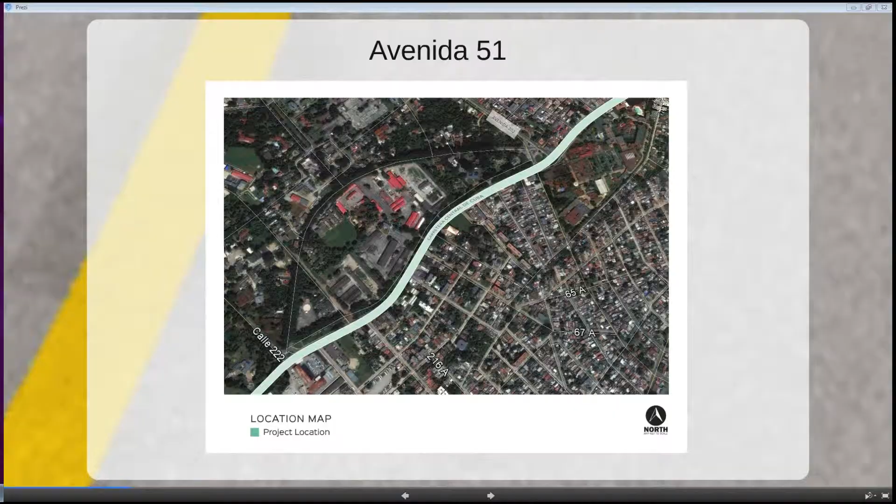This right here is the location map of the corridor we're going to be analyzing, and you can see our boundaries from Calle 222 to Avenida 202, and we've created this for you. This is a little background on Carretera Central. It's a highway that gives east and west access throughout the island of Cuba. The construction began in 1927, and it was completed in 1931, and it cost about $107,000 per mile to complete this project.

In the 1950s, Carretera Central was one of the most efficient highway systems in Latin America, but since the late 1950s, there hasn't been much investment made into the transportation system, which has caused the roads and the highway system to deteriorate. And this has affected the economic growth for Cuba. And right here, we've shown a map of Carretera Central.

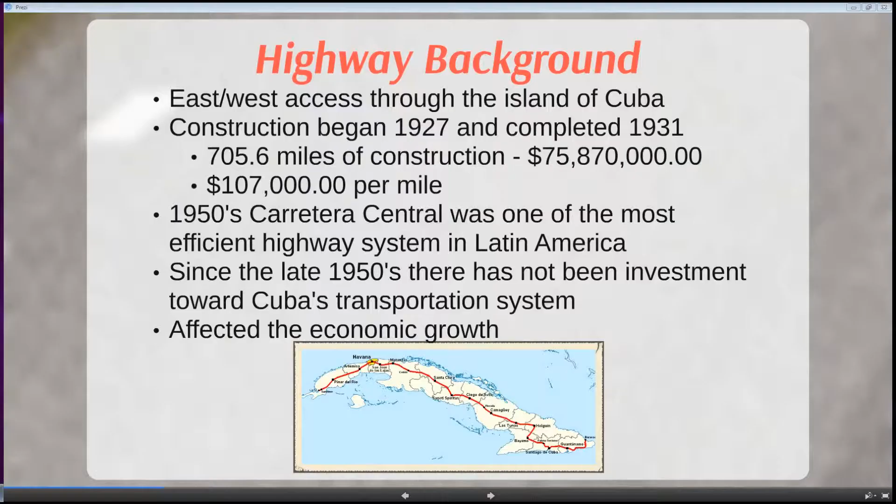Okay, for the roadway characteristics, Avenida 51 is a major arterial. It runs from Pinar del Rio to Guantánamo. But within the project vicinity, Avenida 51 is going to be a 4-lane, 2-way undivided roadway. It's going to have 11-foot travel lanes, 10-foot shoulders, sidewalks, and the posted speed limit will be 40 miles per hour. And we've shown this exhibit here for you, which is the proposed lane configuration for our corridor.

And the two intersections, which are Calle 222 and Avenida 202, are local roadways. Calle 222 is going to be a 2-lane, 2-way undivided roadway. And Avenida 202, on the north side of Avenida 51, is going to be a 4-lane, 2-way undivided roadway. And the south section will be a 2-lane, 2-way undivided roadway.

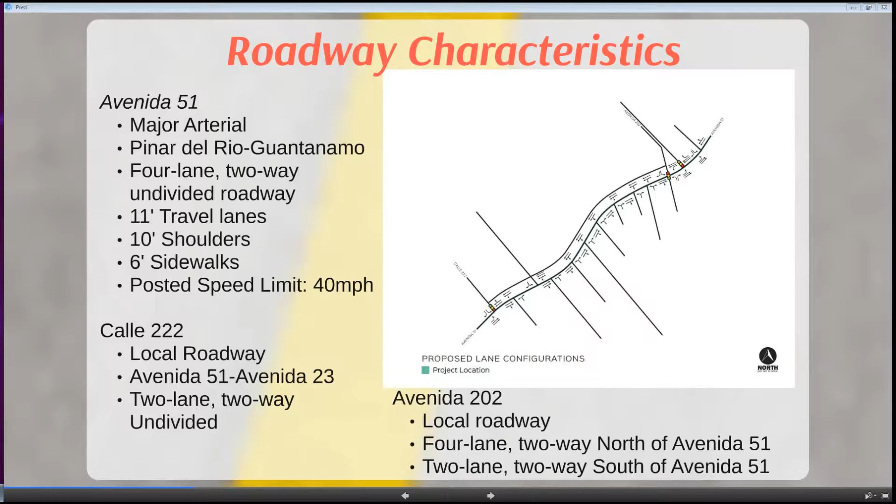In order to perform the roadway capacity, we're going to use the Synchro software for the intersections and the corridor, and this will help us establish the existing level of service and the future level of service of this to make sure it will run smoothly.

In order to get this information, we're going to have to do turning movement counts and segment volume counts during the AM and PM peak periods, and this will help establish the existing level of service. And right here we provided, from the Florida Department of Transportation, the quality level of service for a 2-lane undivided with left turn lanes. And these are the peak direction volumes for each level of service.

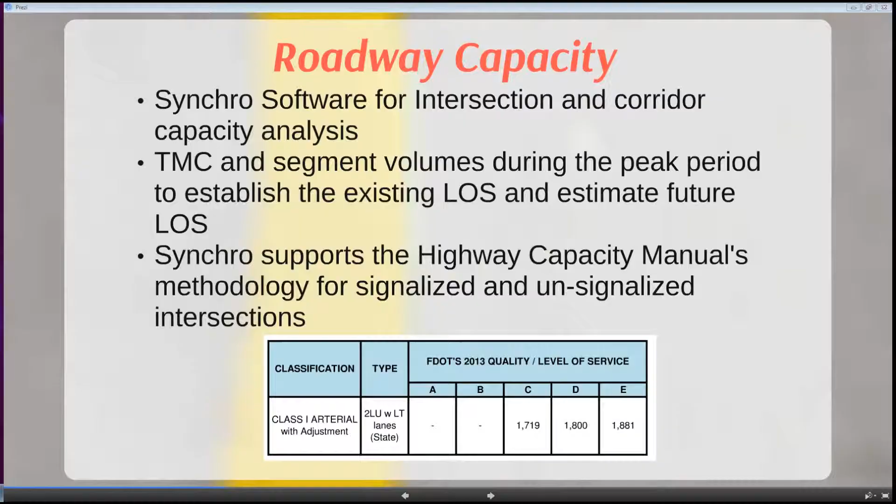For the intersection analysis, what we're going to accomplish is a safer roadway for drivers and pedestrians, since there's a high percentage of pedestrians on this roadway. Also, for this intersection, the signage position and size is very important because you do have drivers with vision issues and slow reaction time. And by fixing this, it will help prevent high rates of crashes and pedestrian fatalities.

Also, by having intersections, it will control the right-of-way, and this will reduce any traffic delays, accidents, and conflicts to the existing and future traffic. And in order to achieve this, the intersection capacity will have to be established. And if we do have to implement new intersections, a traffic signal warrant will be recommended to make sure that it is needed at that section and not create extra chaos in the traffic. And also signal timing implementations will be needed.

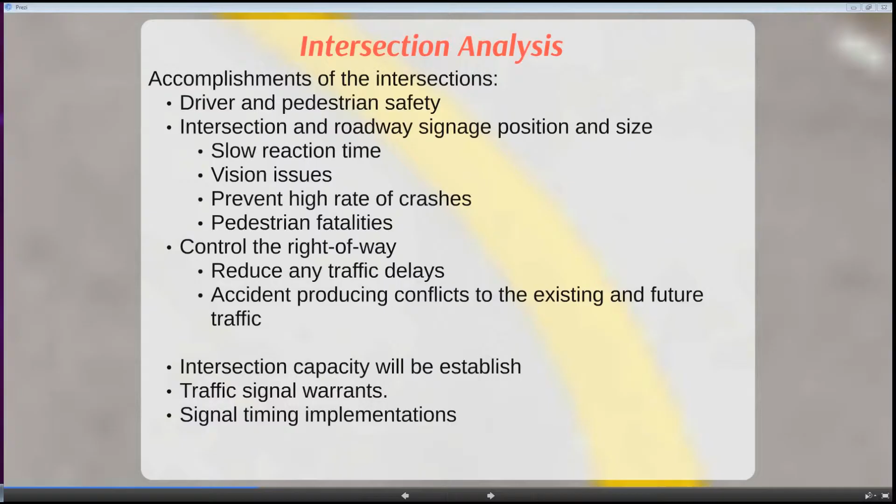I had to press play.

This is a simulation we've created for you today from Synchro. So you can see the corridor. We've put some traffic in it. And you can also see the two intersections, and it's going to zoom in and show the traffic flow on the corridor.

As far as signalization is concerned, we plan on placing a mast arm at the intersection of Calle 222 and Avenida 51, as well as mast arms at the intersection of Avenida 202 and Avenida 51.

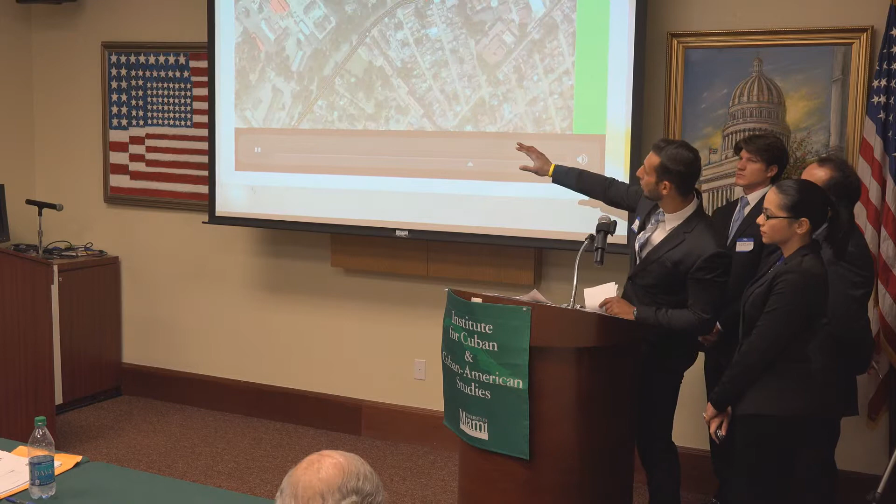Over here, as you can see on the side streets, we utilize stop signs along the side streets because if not, it'll create too much stopping and going. And then over here on this side of the project, later I'm going to show you a detour plan that will utilize these side streets around the back for detour planning for nightly shifts to be able to phase the traffic back and forth.

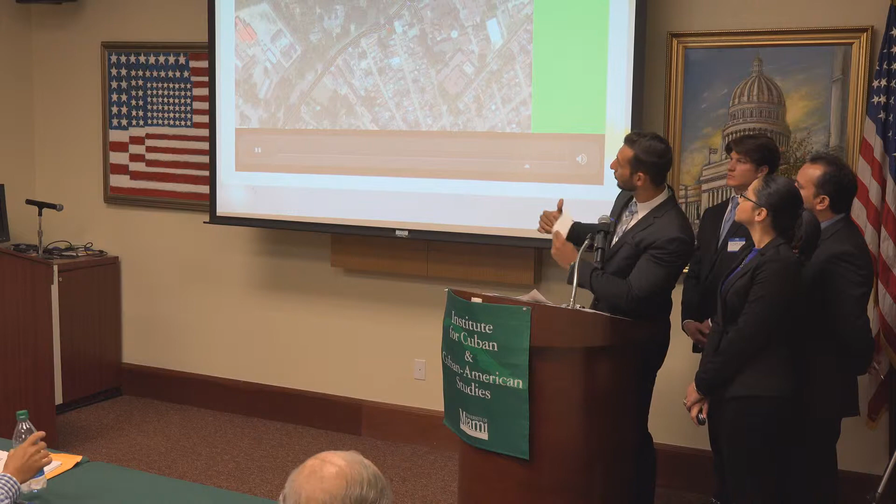All right, so it takes several disciplines to get a project like this done. One of these disciplines is going to be the geotechnical engineering aspect. We approximate there will be no more than 3 core borings needed for this project. Mainly, we take a core boring where we expect miscellaneous structures to be placed, so at least 1 per intersection. The borings will be done using the standard penetration test.

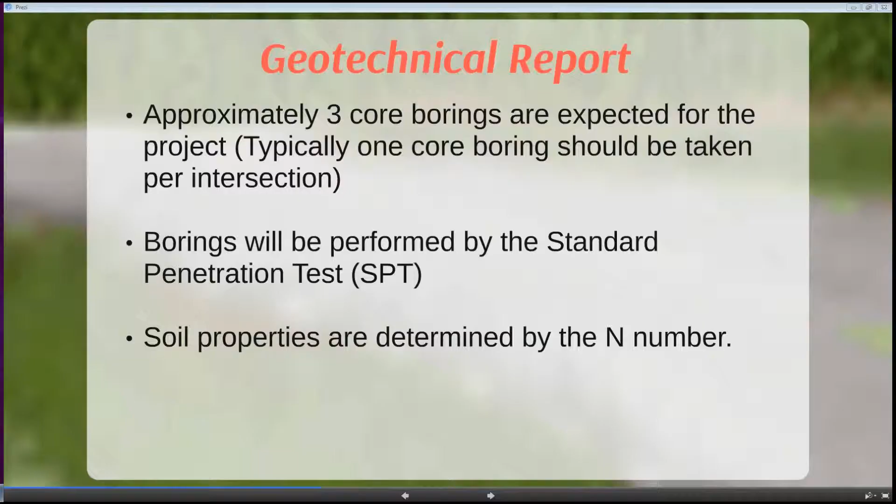This will allow us to get N values that will later lead to other soil properties, which I'll go over later on, to basically design the roadway and the foundation for the structures. In our previous research, we have seen that the predominant material in this area is the red limestone. That being said, we are not going to blindly go by this. When we take the geotechnical core borings, we plan on taking the material to the lab to analyze and find out if the research is backed and find out the true strength of the material in the area.

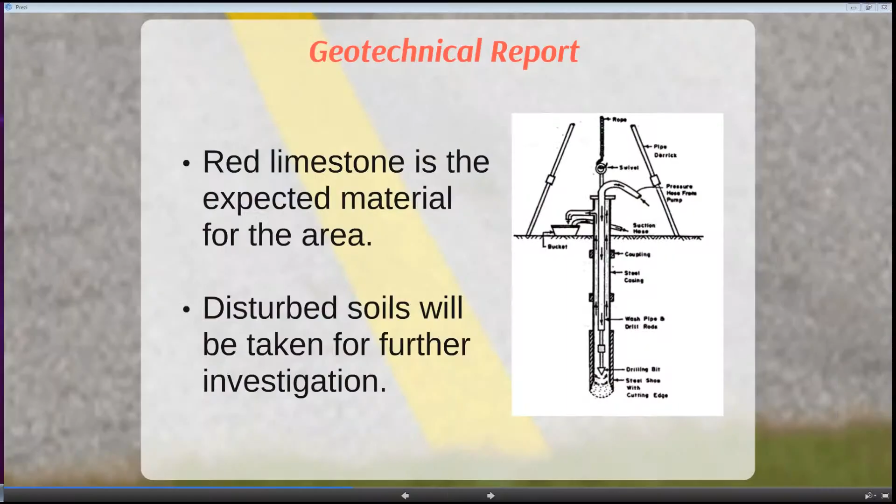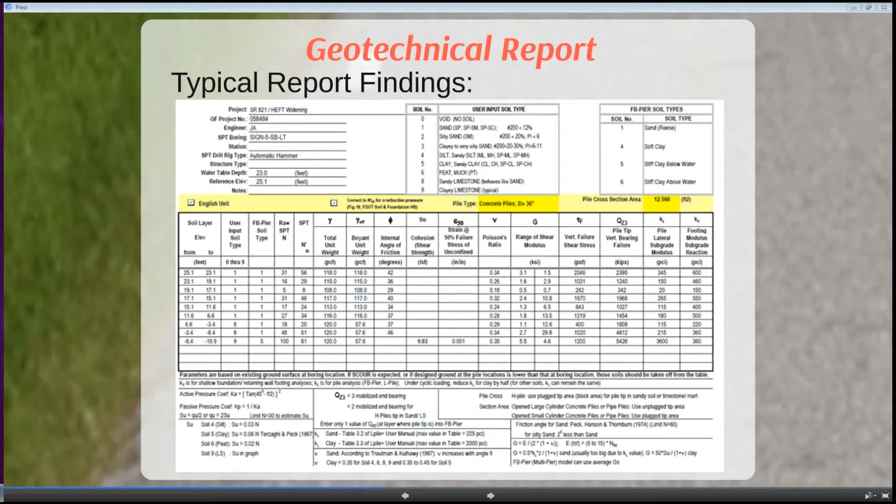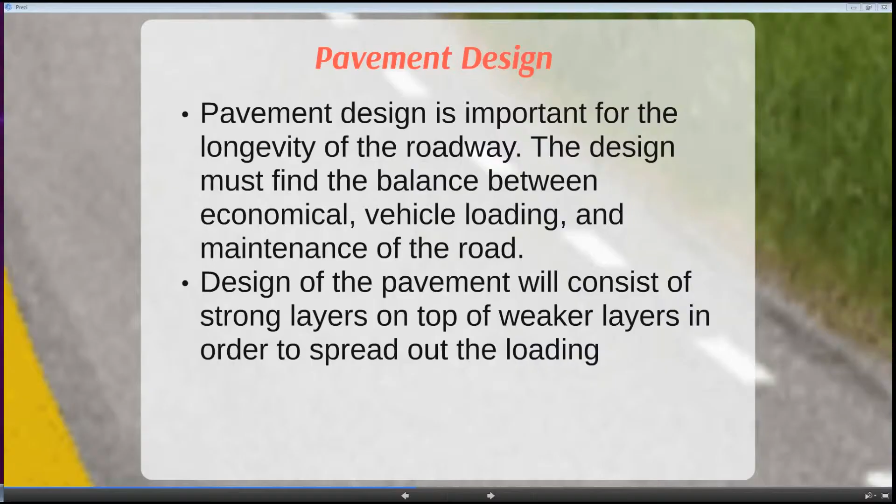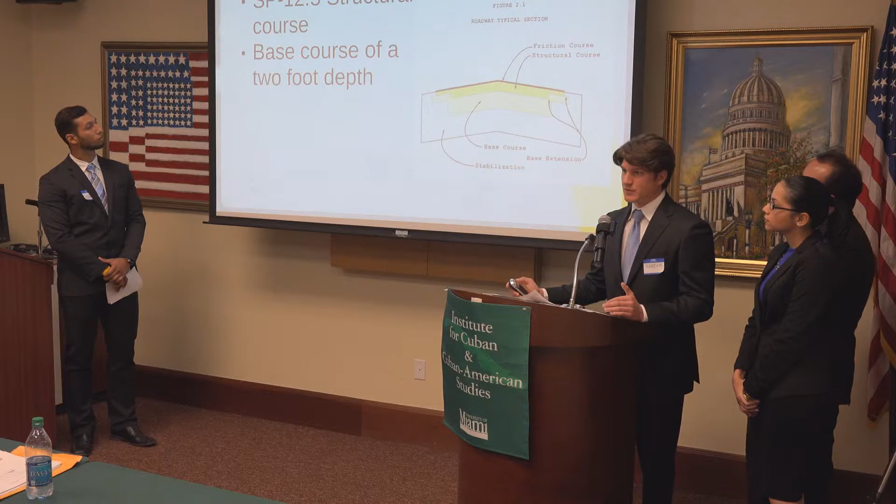Why do we need this information? To design the roadway and other structures. The pavement design is important for the longevity of the roadway and for the roadway not to have any potholes and things like that. The pavement design will include an FC 9.5, which is a one inch thick layer friction course at the top, an SP 12.5 structural course, we expect about 2.5 inches for this layer, and a base course of about a 2 foot depth.

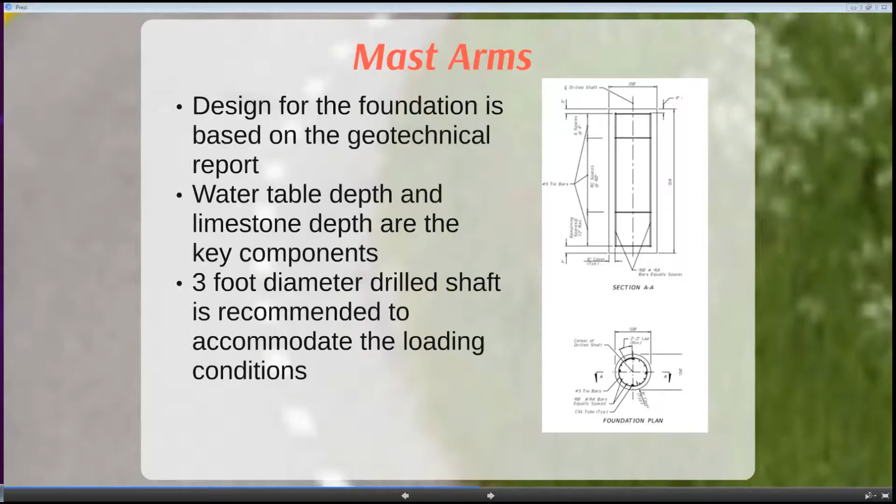Now, another reason that we need these geotechnical investigations is for the foundation of the mast arms. Here we have a typical core boring. The typical drill shaft will show us a depth of basically 10 feet. We don't expect anything greater than a 3 foot diameter to be used, and this is to optimize the structural design. This is a typical mast arm.

This is pretty much what the project is trying to implement: better safety on the roads. That way we have the lights above and everyone can see what's going on. There's also been a safety study to add backplates around the lights for better vision, and the budget of the project will ultimately determine if we implement this.

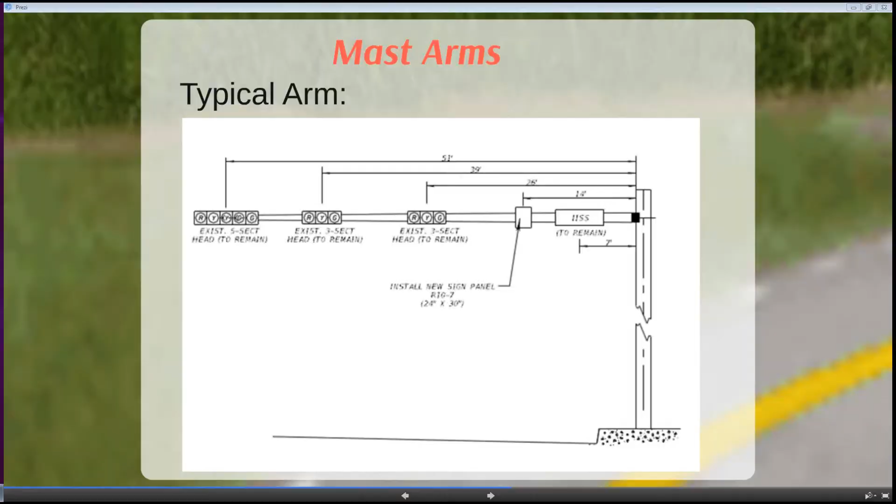The design of the mast arms may include a luminaire, as I've shown in the diagram. This is for lighting the roadway at night and better safety, as well as another safety issue, which is providing pedestrian walkways and bicycle paths.

And I'm gonna bring in Carlos for another discipline. Thank you. Please.

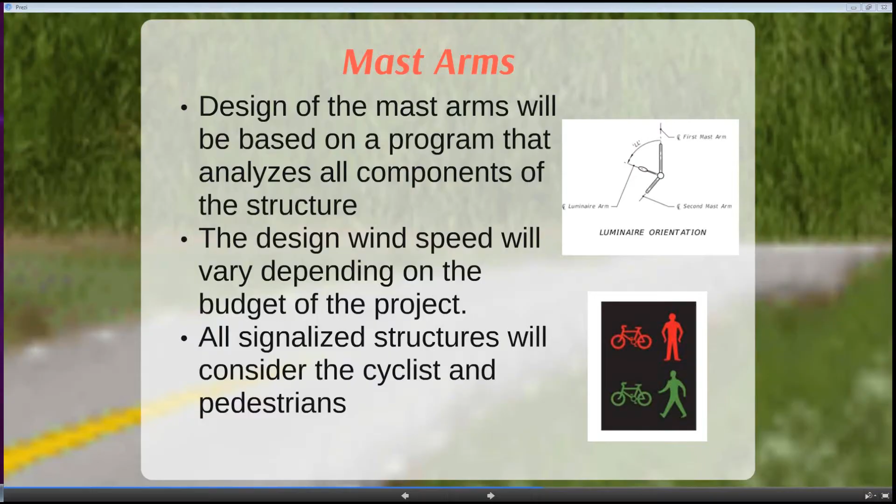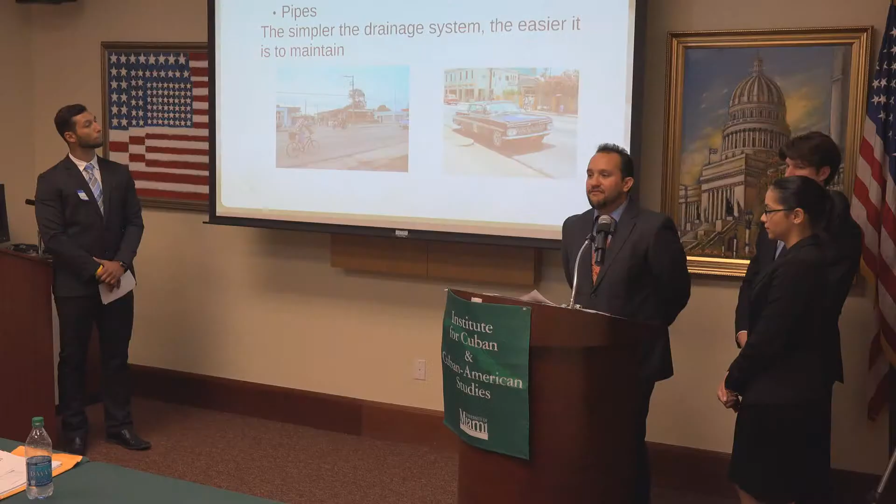So due to the lack of information from the island, the design of the drainage would have to be somewhat generalized. Once we get on the ground, we'll have to investigate each and every single catch basin, manhole, and pipe to get an idea of what the design is like. Obviously, we can expect damage due to lack of maintenance and just because the system is extremely old.

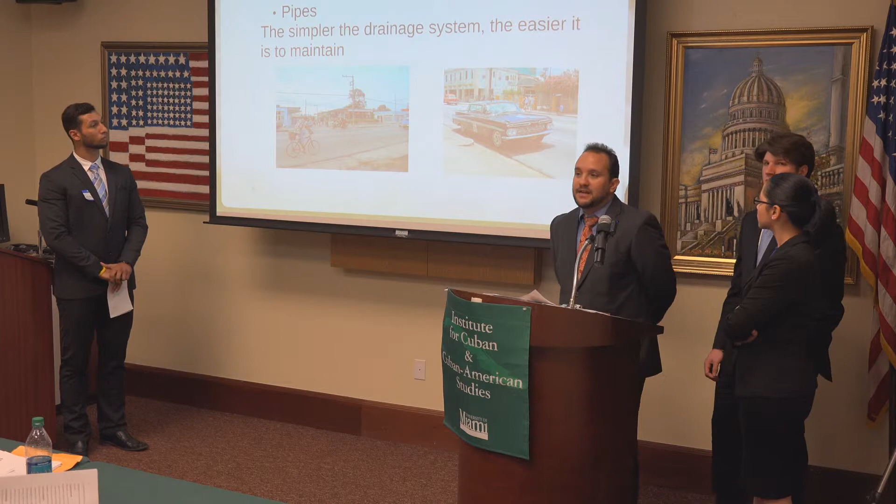So we will take that information back to the office, run hydraulic models, and see if the system is adequate, if it needs to be expanded, if it needs to be refurbished, if we can leave it, if we can clean it out. Once we have that, from there we have two options. If the design is adequate, we can go ahead and run another investigation and assessment, if you will, to decide what we're going to keep and what we're going to throw out. And then we go ahead and proceed with construction.

If for some reason we decide we have a little bit more money and decide to redo the whole system, then, in my opinion, we should go through the FDOT process in order to design a new system so that we can leave them with something much better than they have now.

And the one thing that I would like to impart is that the best thing to do for the Cuban people in a new regime would be to give them a simple system that they can maintain and repair in the future, and that doesn't cause them too much of a burden, so that they can continue to do this over and over again throughout the island.

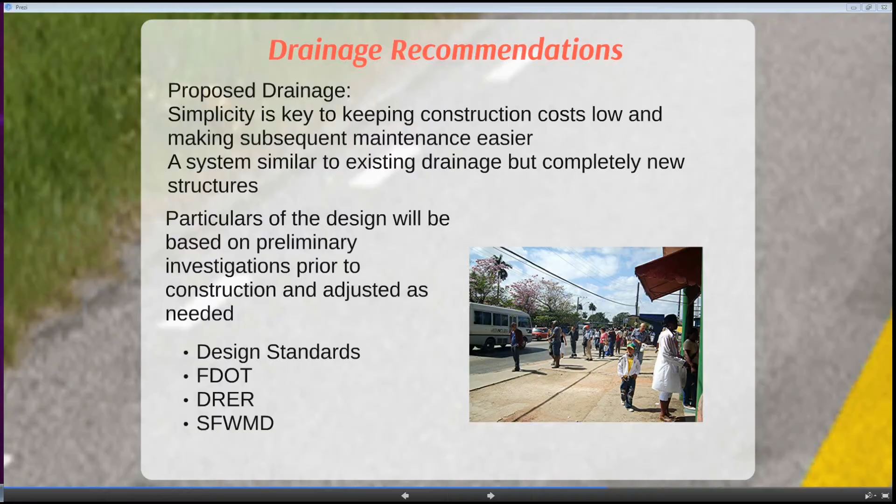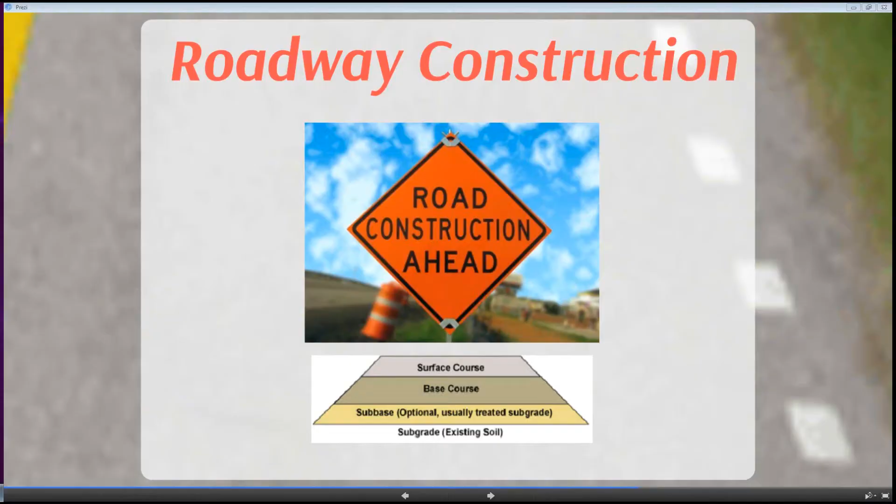Roadway construction. EACC Engineering has constructed a simple but comprehensive management plan to process the project on a time and quality basis. Go ahead, next slide. Over here we have a few bullet points to describe the critical aspects of construction management: strict adherence to environmental permit requirements, but most importantly, utility coordination. Utility coordination is what makes or breaks a project, based on the claims that we have during projects.

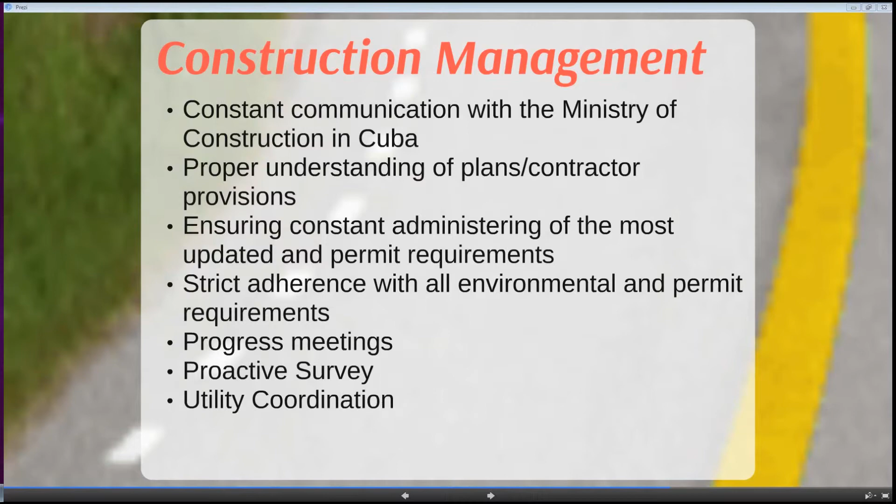So we will go ahead and do subsurface utility engineering to locate the utilities along the project. The phases of work will place significant importance on maintenance of traffic and public outreach for the safety of the public and the workers on the project, because there are a lot of fatalities in construction work zones, sadly, but if we continue safe maintenance of traffic and public outreach, we can go ahead with that.

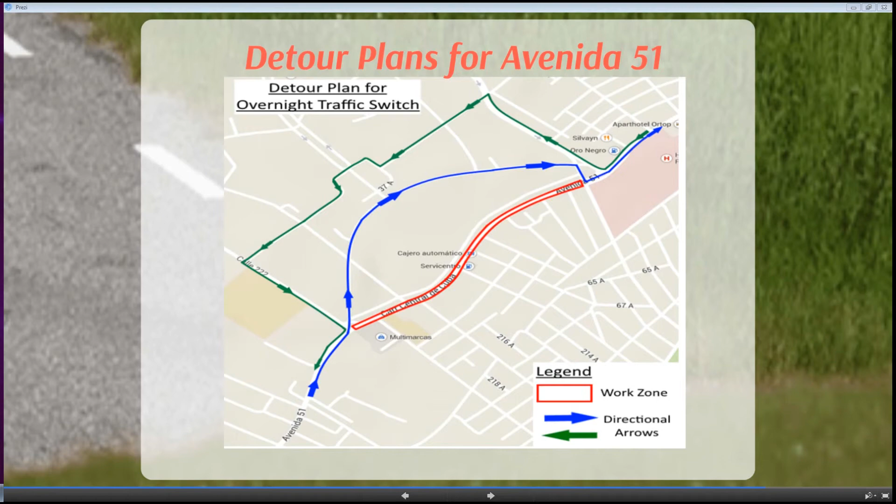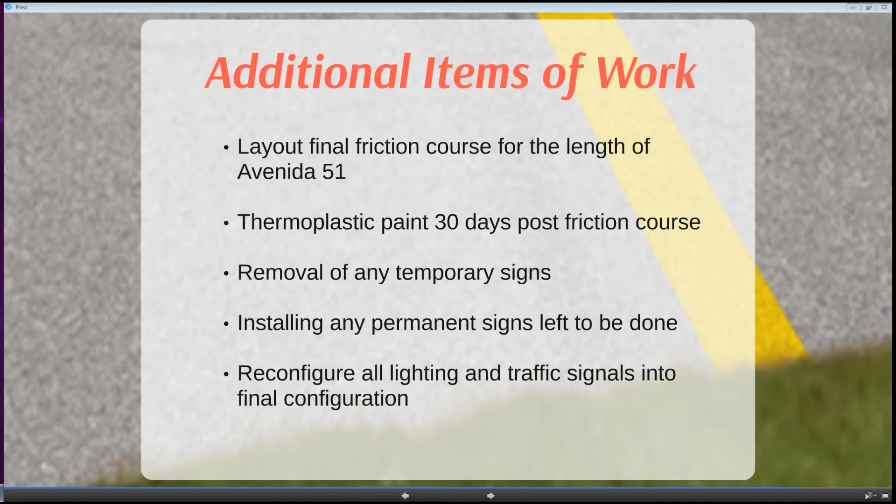On the budget aspect of the project, we have to go for the $4 million budget that we derived from the construction quantities using FDOT historical data. That's how we came up with the $4 million value, and we're gonna go with the Highway Trust Fund, based on user-related taxes and fees, to help maintain the road and to promote economic growth. And this is our conclusion.